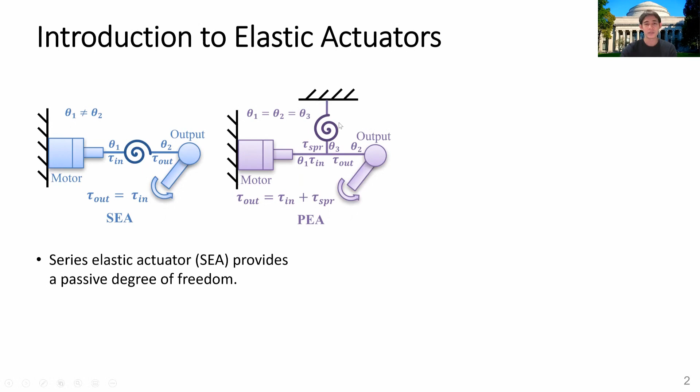We have two possible ways to constrain the spring to the system. The first way, we connect the spring, a high stiffness spring, to the output directly. With this configuration, we can use a high stiffness spring. The second way is to constrain the spring between the fixed part and the point before the gear. In this configuration, we can use a low stiffness spring, but we need to decide more carefully the deflection range of the spring, because the range of the deflection needs to be multiplied by the gear ratio in order to obtain the desired range of deflection at the output.

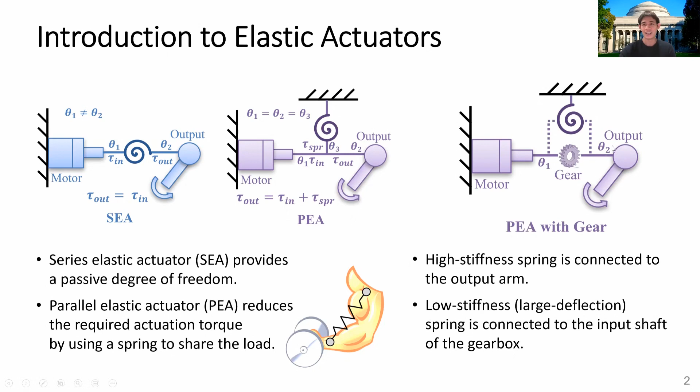The spring-embedded planetary-geared parallel elastic actuator was developed on the planetary-geared type with a fixed ring gear, connecting the input to the sun gear and the output to the carrier, because this configuration can keep the highest possible gear ratio for the set of gears we have. According to the fact that when the carrier rotates and the sun gear rotates, the sun gear always rotates with higher angular displacement than the carrier.

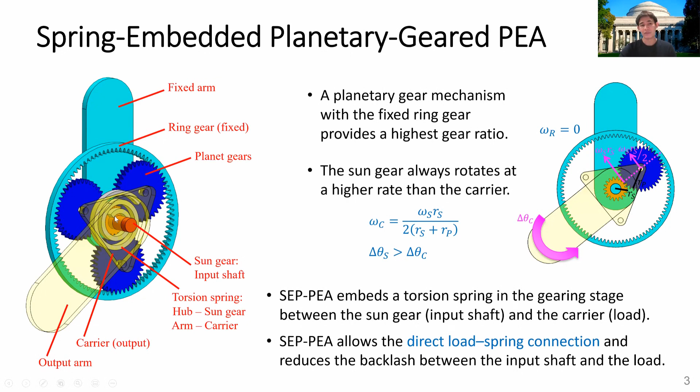So we put the spring between the sun gear and the carrier, and when the system rotates, the spring will store and release energy. We put the hub on the sun gear and the spring arm on the carrier. This configuration not only allows us to use a low stiffness spring, but the spring also connects directly to the output and to the input. So under the preload of the spring, we can reduce the backlash between the input and output.

If we consider the static force in the system, we first check the planet gear. Let's assume F1 at the contact point between the planet and the ring. To satisfy the equilibrium of moment, we need to have this force, and to satisfy the equilibrium of force, we need to have F2 at the center. When we check the sun gear, we have the reaction force F1, the torque from the input by the motor, and the torque by the spring. So we can derive this equation. And on the carrier, we have the spring torque, the output torque, and the reaction force F2.

So until now, we can derive the relationship between the output torque, the spring torque, and the input torque provided by the motor. But we know that we can derive the spring torque from the difference between the angular displacement of the sun and the carrier also. So finally, we can write the equation of the output torque in terms of the angular displacement of the output, or the carrier, and the input torque. We define this bracket as the stiffness amplification factor. It tells us that we can use a small stiffness spring and multiply it by this factor so that we can get the output stiffness at the carrier.

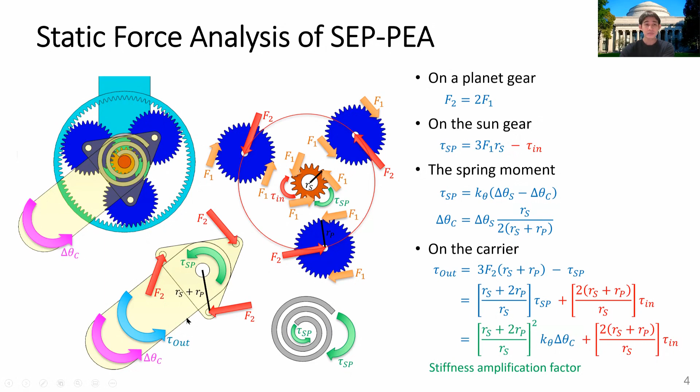Writing in terms of the gear ratio, the output torque of the spring-embedded planetary gear parallel elastic actuator is the linear combination of the input torque multiplied by the gear ratio and the spring torque multiplied by the ratio n-1. In this picture, the sun gear connects to the planet and the spring, and the carrier is connected to the arm of the spring and the pinpoint of the planet.

So the theoretical torque of the mechanism, if we assume the gear ratio, the spring constant, and the input torque of this value, let's see the plot.

We have the linear relationship between the passive output torque and the angular displacement of the carrier. This is in the backward rotation. If we want to go in the forward rotation, there is a torque shift due to the hysteresis, and it shifts up in the forward direction.

And before, the backward rotation is shifted down by the hysteresis and backward. If we apply the input torque during the forward rotation from this angle to the final angle, the active input torque will be multiplied by the gear ratio and affect this torque shift during the forward rotation.

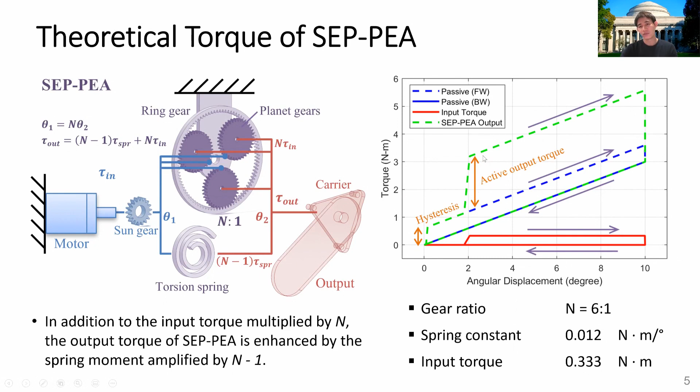So from this concept, we build a prototype. We have the sun gear module that has the sun gear and the spring, and the arm of the spring is constrained on the carrier. The carrier has 3 planets here, and everything will be put into the housing, which is the ring gear module.

And the ring gear is put on top of the measurement surface of the force sensor to measure the output torque. Inside the force sensor, we also have another encoder to measure the rotation of the carrier so that we can achieve the angular displacement of the carrier with higher sensitivity.

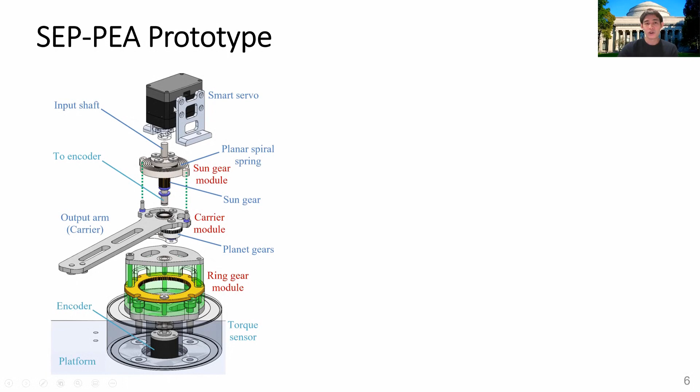And we also have another servo motor to provide the input torque to the sun gear. We have the spring, the carrier with planet, and we assemble it to the sun gear, spring, carrier module. This is the complete assembly when we put everything into the ring gear module and on the force sensor, with this motor to provide input torque.

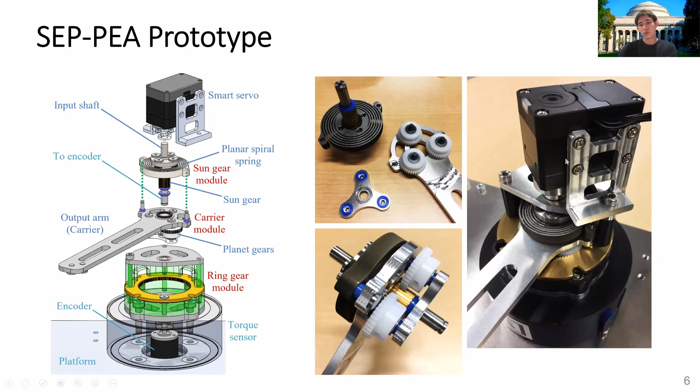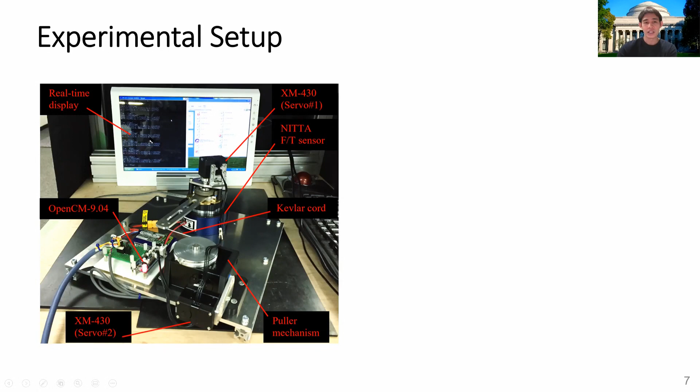The experimental setup has 2 motors. The first one provides the input torque, and the second motor drives the output arm by the Kevlar cord to change the output angular displacement. On the screen, we'll show and record the force, the torque information, and the angular displacement of the sun gear.

In the first experiment, the first motor will be disengaged, disconnected from the system, so that we can see only the passive output torque. In the second experiment, we will control some input torque on this motor to see the influence of the input torque on the output torque of the mechanism.

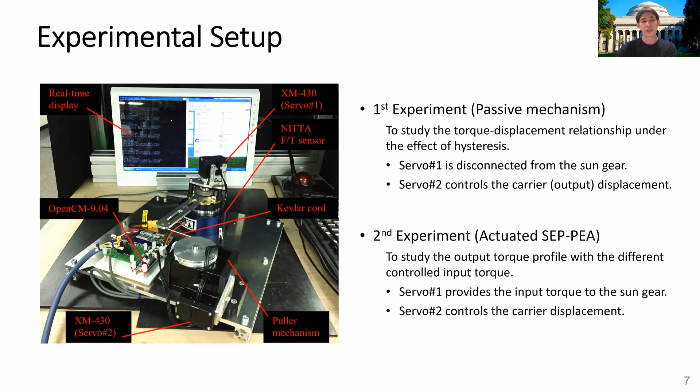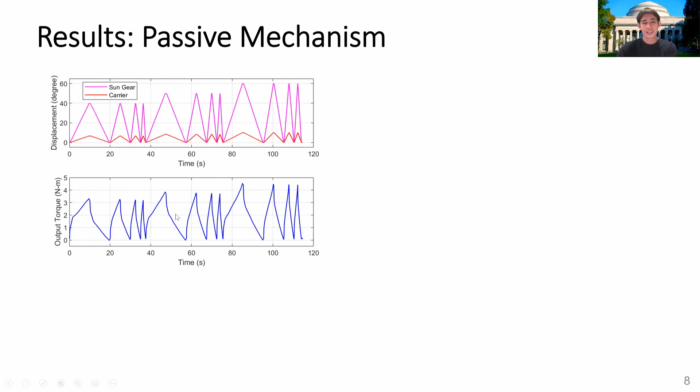So in the first experiment, we drive the output arm to 3 different target angles with 4 different speeds. We can see the increase of the torque with the angle. When we plot the output torque against the angular displacement of the carrier, we can see the linear relationship, both backward and forward rotation.

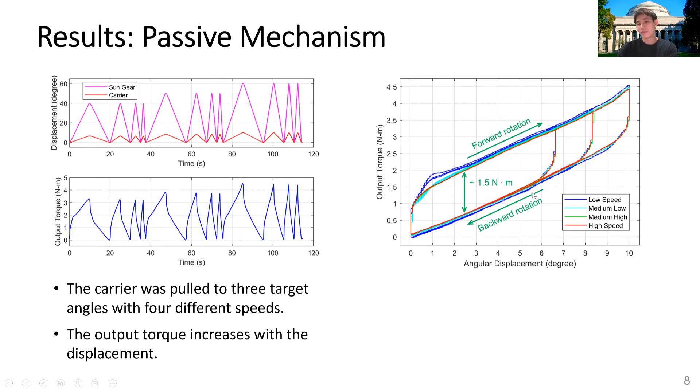But the torque shift due to the hysteresis appears here. Especially here, we can see the overshoot. At the low speed test, we can see the overshoot.

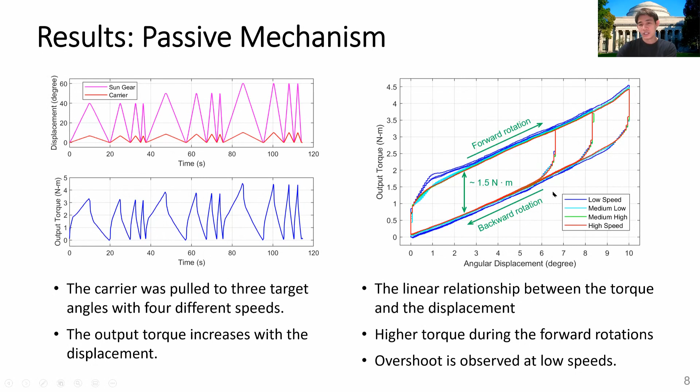How about the actuated mechanism? We drive it to one certain angle and come back. We connect the motor, but didn't actuate it, just to see the effect of the motor gearbox friction in the fourth and the first round of motion.

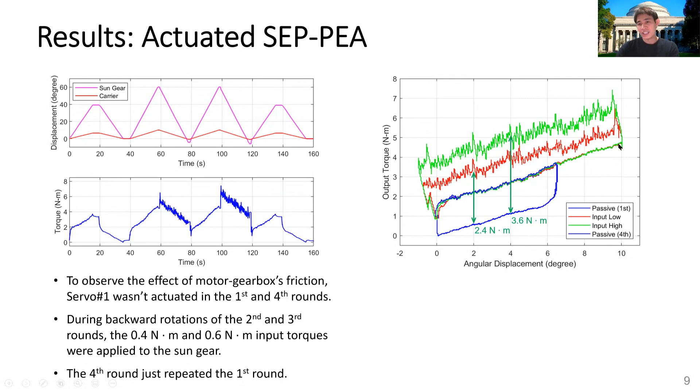But in the second and the third round, we provide some input torque to the system. We can see that this is the passive motion, just the effect of hysteresis of the spring and friction in the motor gearbox. In this second and third round, we can see the effect of the input torque that can shift up the output torque of the mechanism.

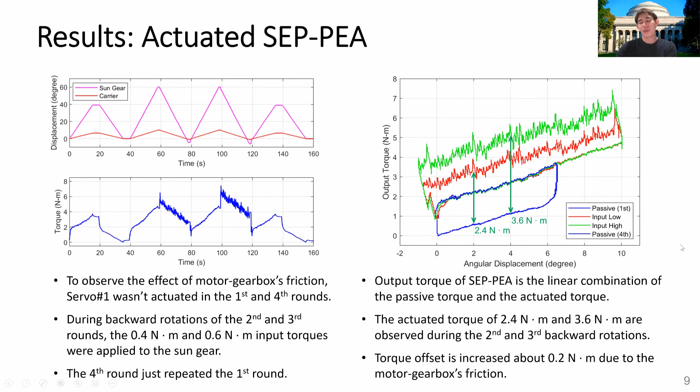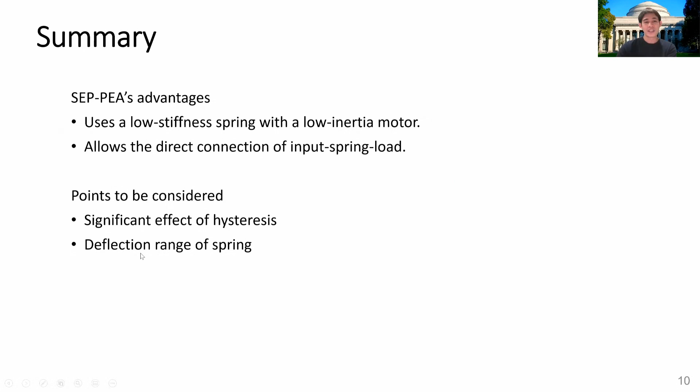So to sum up, we can realize we can use a low stiffness spring and low inertia motor to compose the actuator, and we can directly connect the input, spring, and load. But we need to consider the effect of hysteresis compared to the conventional design, and we need to consider the deflection range of the spring that we use.

Ongoing effort will be a deeper model for better evaluation, and we will evaluate the performance of the actuator with the standard testing method.